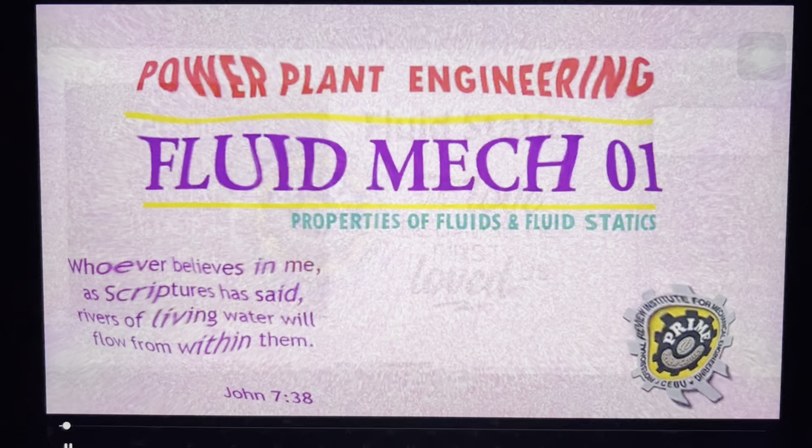Okay, so we have fluid statics. That means these are fluids at rest. So let's begin with the concept.

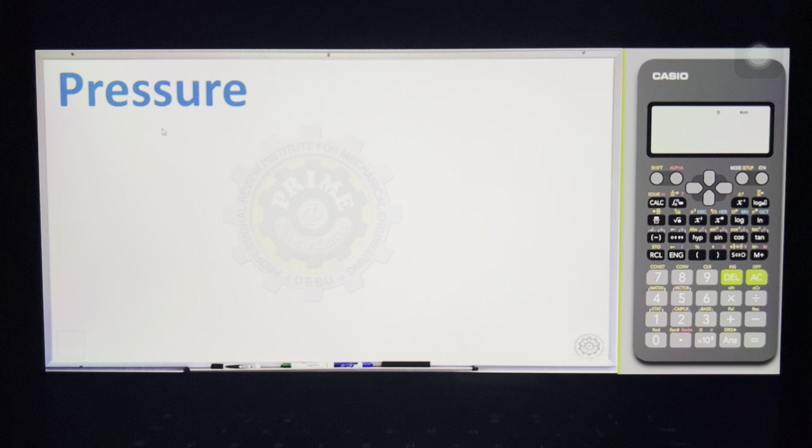Now let's talk about pressure. When we say pressure, it is the normal force acting on a unit area. So basically, the formula for this is simply force over area.

Now, what are the possible units we expect? The units of pressure, most likely for SI, is simply Pascal. Pascal means Newton every meter squared. So that is a unit of pressure, Pascal.

If kilopascal appears in the board exam, the corresponding unit is kilonewton per meter squared. Another useful conversion is megapascal. Megapascal is mega Newton every meter squared, or more commonly used, Newton every millimeter squared. That's what megapascal means, either mega Newton per meter squared or Newton per millimeter squared.

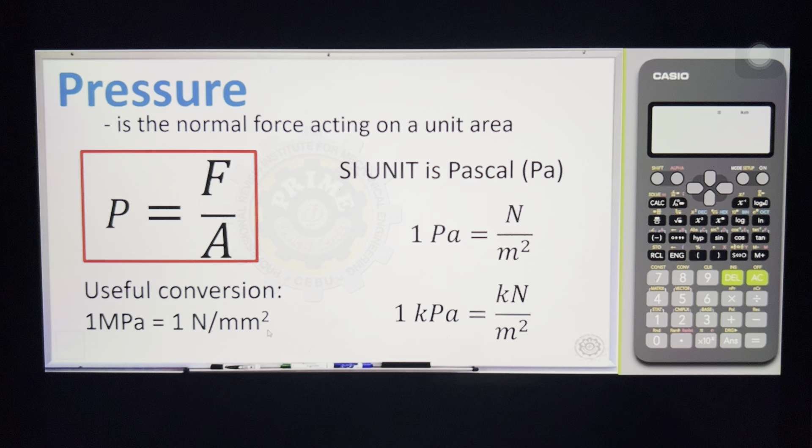Okay, next, let's define Pascal's law. Pascal's law states that at any point in a fluid at rest, the pressure is the same in all directions.

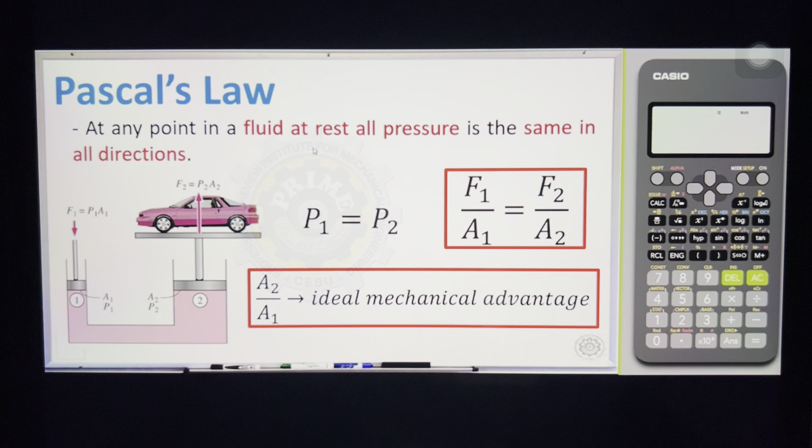Next, pressure given the depth of the fluid. This is a typical question in fluids. For example, we have a fluid exposed to the atmosphere, with a certain height, and we want to know the pressure at the bottom.

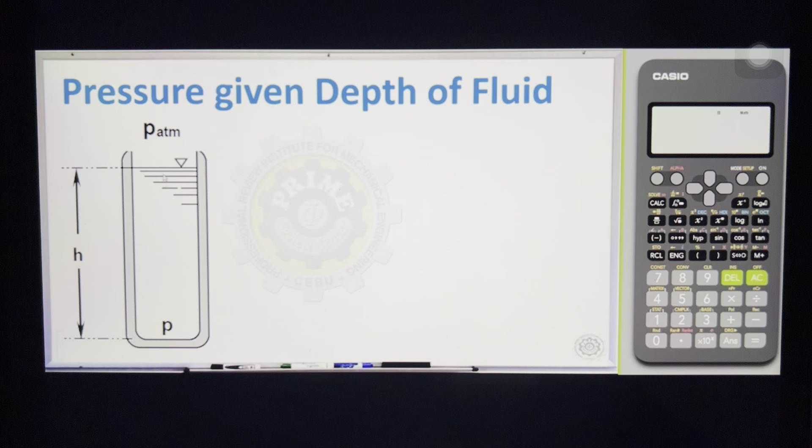So the pressure at point P - to solve it, simply add up all the pressures. We have the atmospheric pressure plus the pressure developed due to height. So pressure at point P is equivalent to atmospheric pressure plus the gauge pressure, which is the pressure developed due to height.

Now, the formula for gauge pressure is simply gamma H. So if given a height, as long as you know the gamma or specific weight of the fluid, you can get the corresponding gauge pressure. Since you're adding atmospheric and gauge pressure, the result you're solving for is simply absolute pressure. So if the board exam asks for absolute pressure, that includes atmospheric plus gauge. But if it only asks for gauge pressure, just use the formula gamma H.

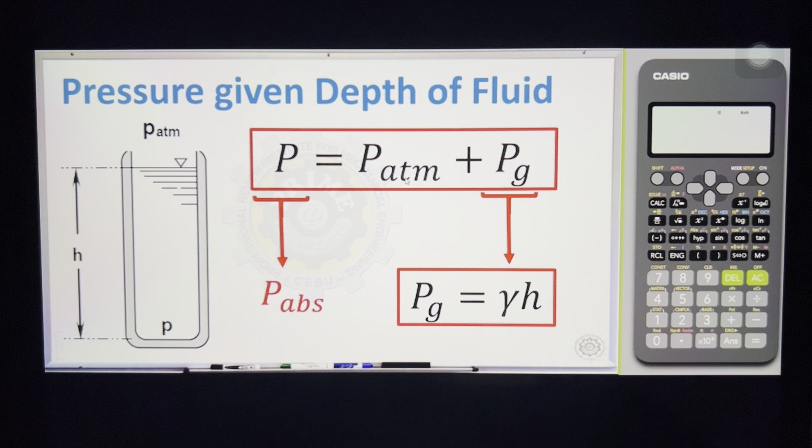Now, regarding atmospheric pressure, that is constant - the pressure exerted by the atmosphere. We should memorize the typical conversions. So I'll list all the useful conversions here, and we should write them down on paper.

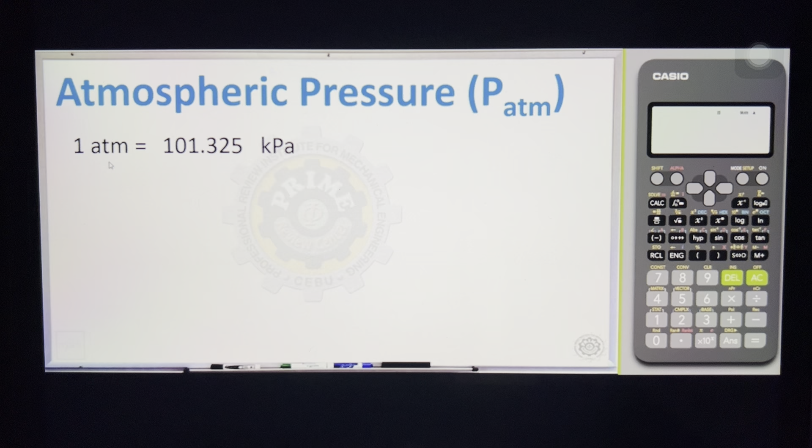So, 1 atm is equivalent to how many kilopascals? That's constant, we should memorize it. That should be 101.325 kilopascal. Another conversion, 1 atm equals how many PSI, pound per square inch? This must be 14.7 PSI.

1 atm, how many millimeters of mercury? Please memorize that is 760 millimeter mercury. And then, 1 atm, how many torr or torricelli? That's the same as millimeter mercury in magnitude, so this is also 760 torricelli.

And then, 1 atm, how many inches of mercury? If you forgot the inch mercury value, but you remember millimeter mercury, you can simply convert millimeters to inches. So you have 760, and our converting factor is 1 inch to 25.4 mm. Simply divide by 25.4, and this comes out to 29.92. So that is inch mercury - that conversion works directly.

Next is kilopascal gauge. So 1 atm equals how many kilopascal gauge? When we say gauge pressure, this is the intensity of pressure measured above or below atmospheric pressure. The measurement basis for gauge pressure is atmospheric - since we are at atmospheric pressure, this is the reference, meaning it is always zero gauge. So when asked for 1 atm or atmospheric pressure, that's 0 kilopascal gauge, or zero gauge.

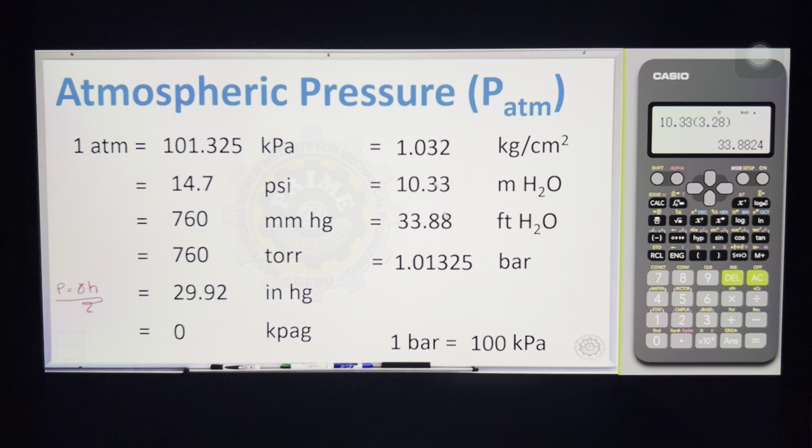Next, problem number 1. What is the pressure at point A in the tank if the height is 2 feet? Meron tayong illustration dito. Given the gravity to be 32.2 feet per second squared and the density is 1.94 slug per cubic foot. Ang tinatanong na pressure, ang unit should be pound force per feet squared.

Sa problem, since walang binanggit regarding sa atmospheric, kaya ang gawin nating calculation is the gauge pressure at point A. Kung sakaling hindi lumabas yung sagot sa gauge pressure, ang gawin lang natin later is mag-add ng atmospheric para maging absolute. Meron tayong gauge and absolute answer regarding sa pressure at point A. Pero most likely, this must be gauge pressure. So dun muna tayo magsimula.

Ang formula ng gauge pressure given yung certain height is simply gamma H. Ito yung working solution natin. Alam natin na yung gamma, kung sakaling hindi given, pwede siyang makalculate using rho G. Ang pressure natin sa point A, pwede pala siya isulat na rho GH. Yung rho G na to, yun lang din yung gamma. Given yung density, gravity, and height, lahat yan given in the problem.

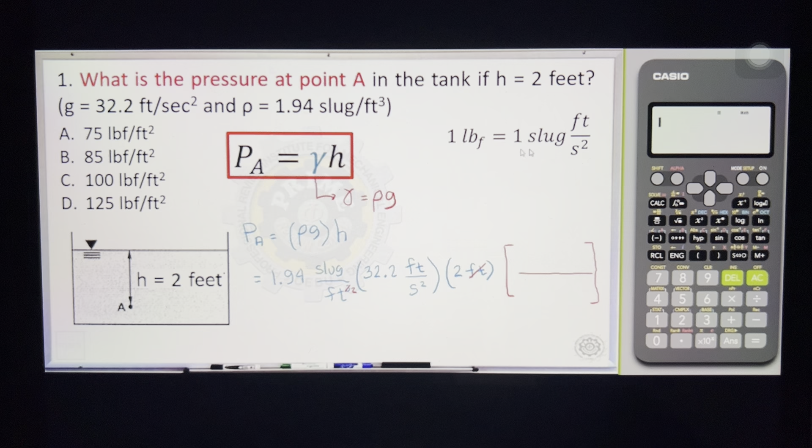Unit analysis na lang kulang. Cancel out yung feet dito para lumabas na yung feet squared. Magiging feet squared na lang yan. Analyze natin yung slug feet per second squared. Sana malinaw sa atin yung mga conversion. Ang ibig sabihin ng pound force, kasi pound force yung hinahanap natin, ang definition ng pound force is slug feet per second squared. Sana malinaw sa inyo na ang pound force, ang unit na pinanggalingan, slug feet per second squared.

So 1 pound force is equivalent sa slug, feet per second squared. Mathematically speaking, cancelled out lang yung slug and then as well yung feet per second squared. Ang matitirang unit na lang talaga is pound force per feet squared. Makukuha na natin yung final answer.

Calculator na lang yung last. We have 1.94 multiply ng 32.2 times 2. Using our calculator, ang tamang sagot should be 124.936. You always choose the best answer sa board exam, obviously, letter D. So 125 pound force kada feet squared. This is correct answer, letter D.

Again, kung sakaling wala sa choices yung lumabas, meaning absolute pressure yung tinatanong, dagdagan nyo lang yung sagot nyo ng atmospheric pressure, lalabas yung absolute. So again, this is problem number 1.

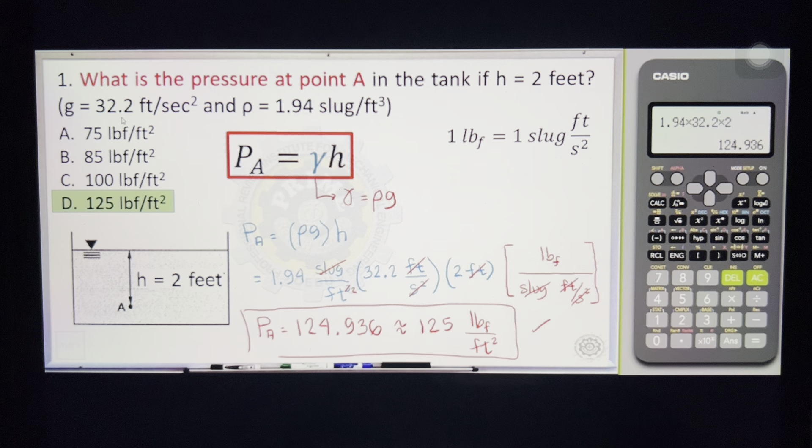Problem number 2. A vessel is initially connected to a reservoir open to the atmosphere. The connecting valve is then closed and the vacuum of 65.5 kilopascal is applied to the vessel. What is the absolute pressure in the vessel? Assume standard atmospheric pressure.

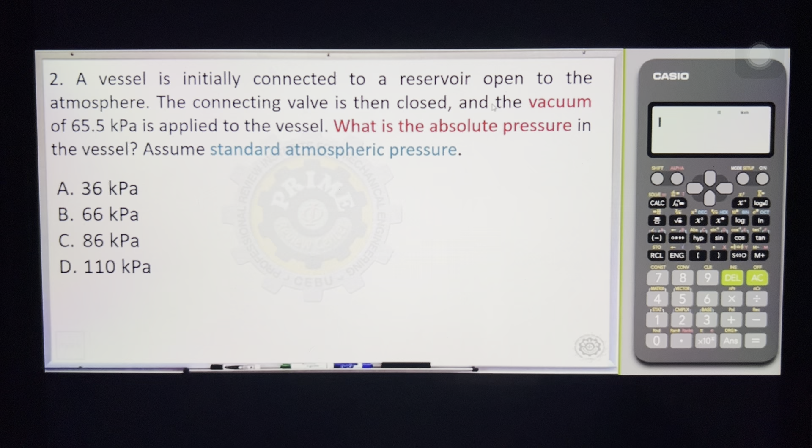Ang tinatanong dito is the absolute pressure. So use our formula. Ang formula ng absolute pressure is atmospheric plus gauge. Ang gagamitin daw nating atmospheric pressure is the standard atmospheric pressure, so alam natin yung value nun. At yung gauge pressure natin, manggagaling siya dun sa ating vessel. Sa loob ng vessel is gauge.

Okay, binigay na yung pressure sa valve or sa vessel na 65.5 kilopascal. Kaya lang, that is vacuum. Again, pag sinabing vacuum pressure, default na yon na that is negative. Ibig sabihin ng vacuum is below atmospheric.

So every time isusulat niyo yung value nun, dapat merong kasamang negative sign. Mabilis lang siya, direct substitution. Absolute pressure is being asked. Atmospheric pressure na standard in terms of kilopascal is 101.325. Yung gauge pressure natin is 65.5 kilopascal na vacuum. Ibig sabihin, negative 65.5. So direct sub, calculator, makuha natin yung sagot.

So you have 101.325, minus 65.5. Lumalabas ang ating absolute pressure sa vessel ay equivalent sa 35.825 kilopascal. We always choose the best answer, so the best answer is 36 kilopascal absolute.

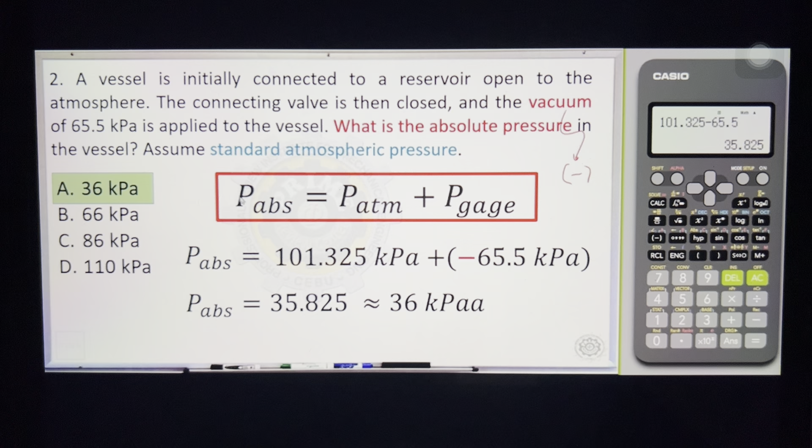So madali lang yung problem number 2. Simply formula dependent, huwag lang kalimutan: absolute pressure is atmospheric plus gauge.

Okay, problem number 3. A vacuum pump is used to drain a flooded mine shaft of 68 Fahrenheit or 20 degrees Celsius water. The vapor pressure at this temperature is 0.34 psi or 2.34 kilopascal. The pump is incapable of lifting the water higher than 400 inches or 10.16 meters. Compute the atmospheric pressure. So you have a vacuum pump, tinatanong atmospheric pressure.

Now, para makuha natin yung atmospheric pressure sa certain conditions na ito, hindi siya 101.325 kasi meron tayong conditions na dapat gawin. Visualize na lang natin yung water lifting ng ating vacuum pump.

Parang ganito yung illustration niya. Andito yung pressure vacuum natin, magsasak siya ng water, tataas siya hanggang 400 inches or 10.16 meters. Ang tinatanong is the atmospheric pressure dito. Para hindi ako nalilito sa ganitong conditions, ang lagi ko tinatandaan regarding sa pressures: same level, same pressure. Kaya tinitingnan ko yung illustration o nag-i-imagine ako, pag merong mga fluids involved, humahanap ako ng point kung saan same level sila.

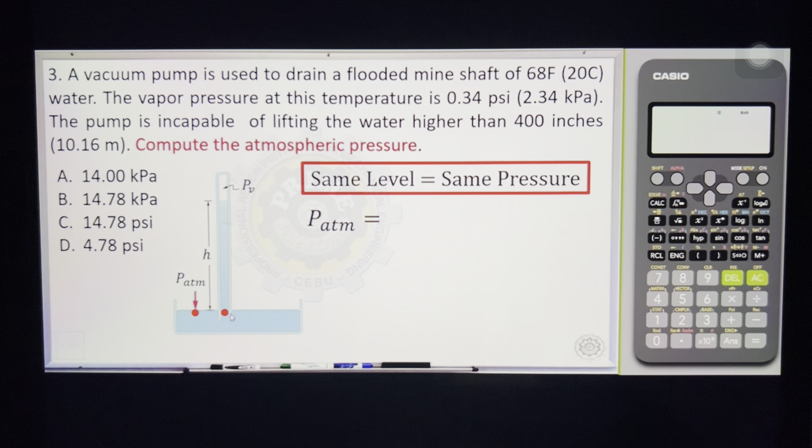Kung tinitingnan ko yung pressure sa loob ng ating vacuum pump, ang pressure total dito ay additive lang: yung pressure dito plus yung pressure due to height. So this is pressure vacuum, plus pressure due to height is gamma h.

Okay, so substitution na lang yan, makuha na natin yung atmospheric pressure. Depende sa inyo kung saan kayo mas familiar. You can use SI units regarding dito kasi yung pressure ng vapor natin pwedeng English, pwedeng SI, at yung height pwedeng English, pwedeng SI, depende sa preference nyo. Pero since mas familiar ako sa SI units, ang gamitin ko na lang is yung SI. So substitution tayo sa SI.

Ang ating vapor pressure in terms of SI is 2.34 kilopascal, plus ang gamma ng ating water, since water is given, constant yun, kailangan kabisado. Ang gamma ng water sa SI is 9.81, ang unit niya is kilonewton every cubic meter. At yung height na kaya niyang i-lift given, i-consider ko yung SI unit, 10.16 meters.

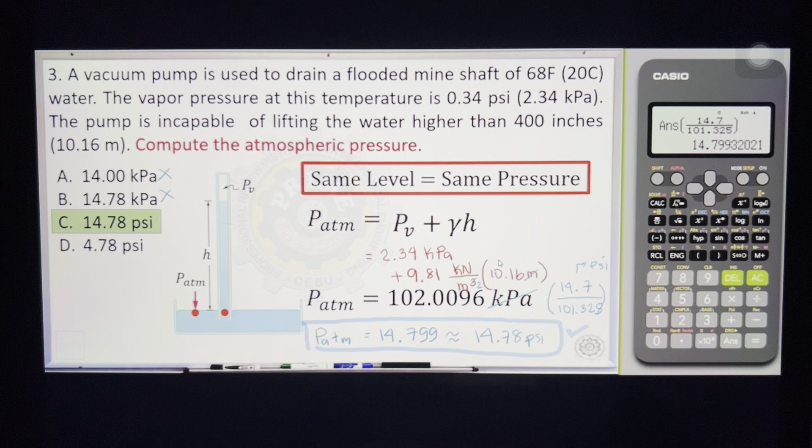So ang atmospheric pressure dito is equivalent sa 14.799, approximately 14.78 PSI. Madali lang yung sample problems regarding sa pressures. Most likely, yung magiging challenging part is simply conversion tsaka unit analysis. So that's it, this is problem number 3.